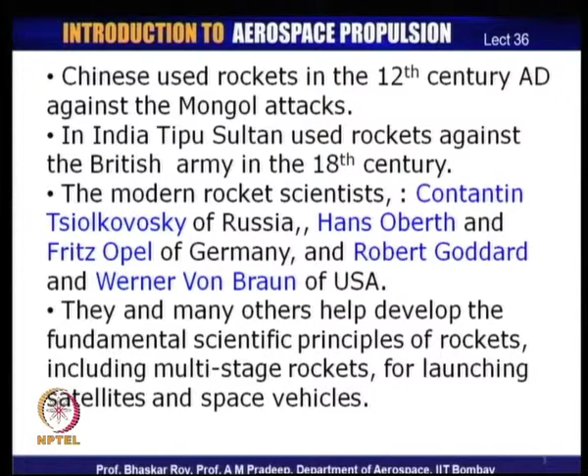Let us take a look at some of the modern rockets. One of the first things that you need to know is that the operation of a rocket is not dependent on atmosphere, nor is it guided by the forward speed, which is the case of an aircraft.

Now, this is an advantage, as rocket is the method of propelling vehicles beyond the Earth's atmosphere. So, the atmosphere would have been an impediment, it would have been a resistance to the craft. So, rocket is designed in a manner that it has least amount of resistance, and then it can fly out of the Earth's atmosphere. Indeed, when you are outside the atmosphere, the shape of the vehicle becomes less and less important. So, the shape that we are familiar with for aircraft is no more necessary for rockets.

The disadvantage, of course, is that there is no air available anymore. Air was the primary working medium for air breathing engines, which means that you have to carry the fuel and the oxidizer. Now, as we know, the fuel and oxidizer both are required for combustion purpose, and hence for rockets you have to carry both of them within the body of the rocket, which means you have to carry the weight of both the fuel and the oxidizer till they are completely used up.

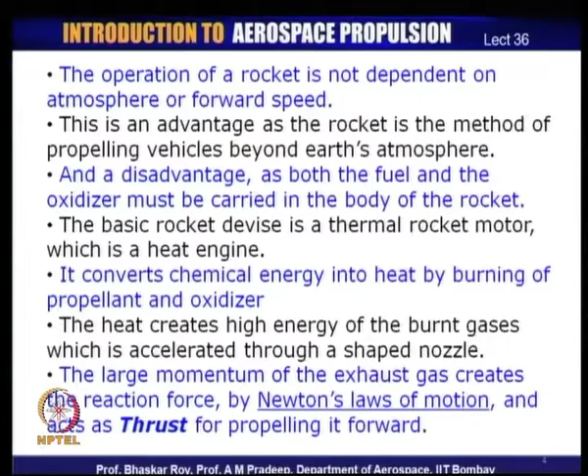So, thrust is created through various physics. First is release of heat, second is expansion of the gas or acceleration of the gas through a properly designed nozzle. And if you do that properly, the exhaust gas then gives a reaction, and then Newton's laws of motion apply, and you have thrust that is created by this exhaust gas. This thrust is what we use for propelling the rocket, first through the atmosphere, as it has to be launched from Earth's surface, and then through rarefied medium outside the atmosphere, and then out into space where there is no atmosphere at all. So, this is the basic mechanism by which a rocket normally works.

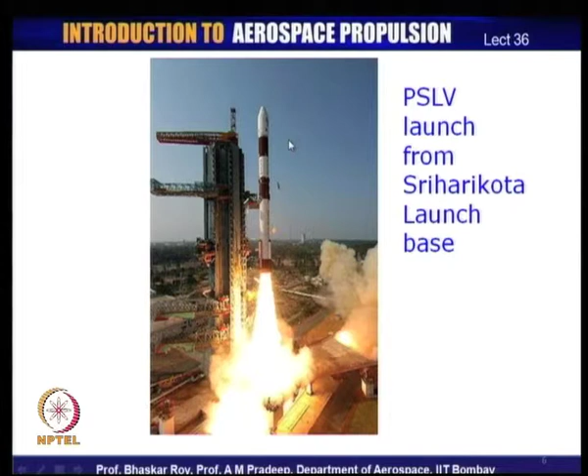So, some of these would actually fall off after the whole rocket has gone to a very high altitude, and then the so called second stage will take over, and then after a certain while the second stage will also fall off, and then the third stage will take over, and after some time even the third stage would fall off, leaving only the payload, which is the main satellite, to go on to its orbit or go on to its mission.

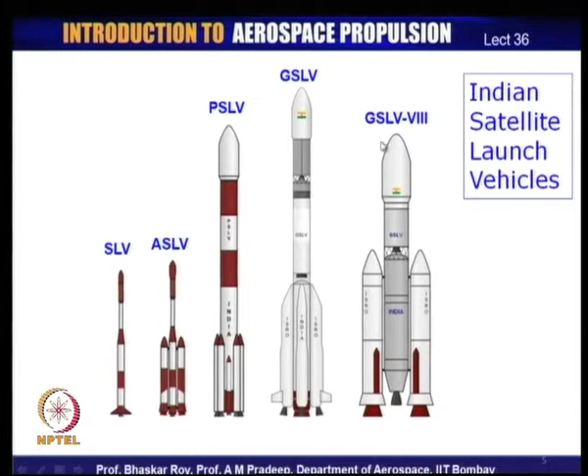We can see that in our Indian rockets also, it has a number of stages. This is the first stage, this is the second stage, this is the third stage. Sometimes you have 4 stages, this could actually be a 4th stage, and then you have the payload on top of it, which is the satellite. So, this is called satellite launch vehicle. So, the whole of it is the launch vehicle, on top of it is the satellite, which is used for various purposes. So, people have been using these for various purposes.

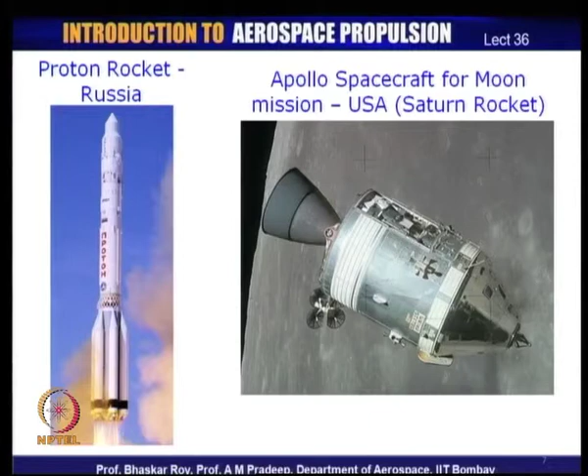US has used it to send man to moon. Russians have also done that, and they also send various satellites to the orbit for various purposes, just like our Indian program. This is the space shuttle Columbia launch, and here you can see that there is a huge big rocket, which is the Saturn rocket, and strapped on that is the Columbia, which is the reusable launch vehicle.

So, the rest of the launch vehicle actually is not reusable. Typically, a rocket, once it is launched and it goes up, most of it falls off and is not reusable. They are completely burnt off and dispensed with. Now, this space shuttle, which is strapped on this big Saturn rocket, actually goes to space, and it comes back and lands like an aircraft.

So, that is why this is shaped like an aircraft, but it cannot take off on its own and go to space. So, it is strapped onto a big Saturn rocket, and then once it is high up in altitude, actually somewhat outside the Earth's atmosphere, the space shuttle gets released from the main rocket body, and then it can go around the Earth's orbit on its own.

As I mentioned, the shape in that kind of orbit does not matter. It could be shaped like an aircraft, or it could be shaped like anything, and it would still go around the Earth's orbit, as there is no air resistance involved. However, when the space shuttle tries to come back to the Earth, it has to again negotiate the atmosphere.

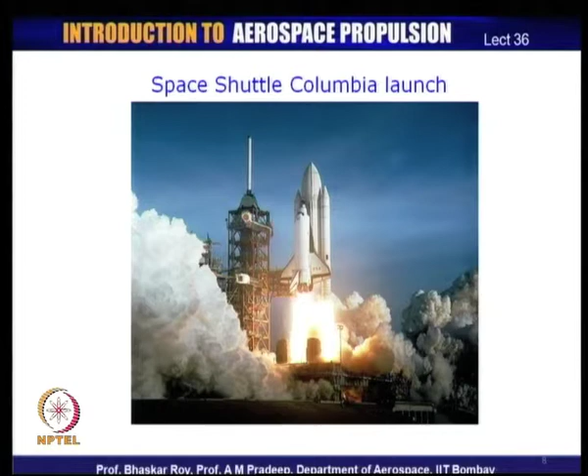So, that is why it is called a space shuttle, because it comes back and it is reusable. It can be launched again with the help of another rocket.

Let us look at various kinds of missiles. Missiles are typically used for various military purposes, and hence some of their configurations may be guarded secrets, but we can take a look at all kinds of missiles that are normally used, and each of them is designed for a particular purpose. Now, missiles are used for certain targets. So, you have a certain target to which the missile is launched, and it has to hit that target.

Now, it could be an air to air missile, which means it is launched from air, maybe from an aircraft, and it is to hit another target which is also in air, could be another aircraft. It could be an air to surface missile, which means it is launched from an aircraft, and it is to hit something on the surface of the earth.

It could be an anti-ballistic missile. We will see the ballistic missiles, and this missile is supposed to go and hit that ballistic missile, to counter a ballistic missile, and hence it is called anti-ballistic missile. So, it has to intercept a missile while that missile is moving in the atmosphere and hit that missile. So, it has a purpose of hitting something in motion in the Earth's atmosphere.

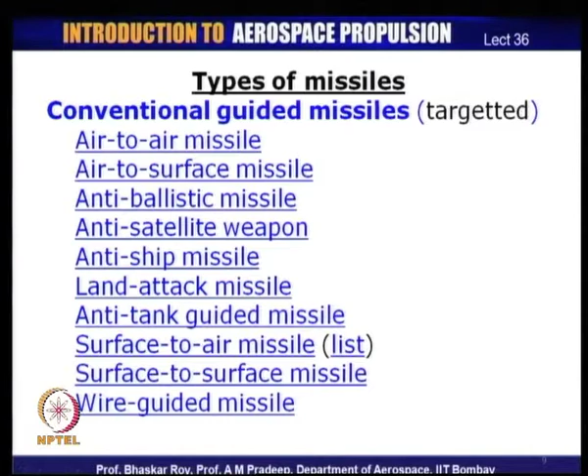Cruise missiles normally have a long cruise flight, very much like an aircraft. That means it flies at a constant altitude for a large part of its flight. Most missiles actually have a parabolic or some arced, curved trajectory, which means that they do not cruise, but the cruise missile is one of a kind which cruises for a long time in its path, which could be hundreds of kilometers, and then lands at a particular predetermined target.

So, that is why they are called cruise missiles. They are designed to cruise at a constant altitude over a long period of their actual flight. Now, the ballistic missiles are the aim and shoot kind of missiles, which are used again for various military purposes, and the purpose is built into the nomenclature or name of these missiles.

They are called tactical ballistic missiles, the short range ballistic missiles, theater ballistic missiles used in specific kinds of war situations, could be on the top of a mountain or in a very difficult terrain. So, those are called theater ballistic missiles. Then you have the medium range ballistic missiles, which can probably go over 100 kilometers or so. And then you have intermediate range ballistic missiles, which go on for maybe a few hundred kilometers and hit a target.

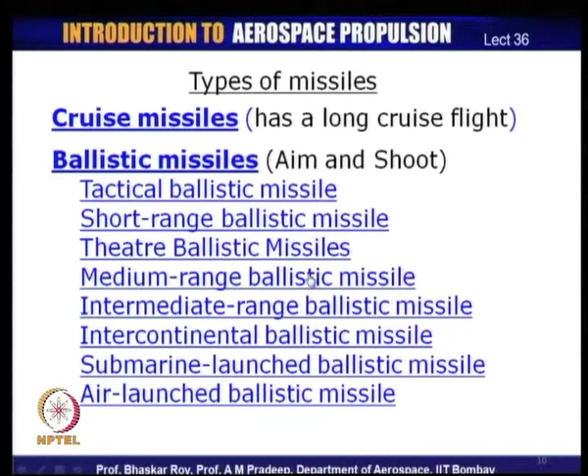This is an old German V2 missile. The reason I am showing this old missile is because most of the other missiles are guarded secrets. They are secret technology, which is normally not available to the general public, and hence we can look at a somewhat older missile, which was actually used during World War II. And as you can see here, the missile houses a number of components. Right on top, you have the unit that is often called payload in simple rocket terms, but in case of a military application, it would be called a warhead.

And then you have the various control systems, which control the craft and finally the warhead onto the target. So, this is the control or gyro control, as it used to be known earlier, which guides the warhead or the payload onto the target. And then you have various other systems, the radio system and so on, which are housed over here for it to be communicated with the ground system, so that the ground control can guide this system onto its target. The various other systems are there.

The rocket body, as you can see here, houses all the other systems. You have the liquid oxygen that is stored over here, and you have the hydrogen peroxide tank, which is stored over here, and then you have the nozzle at the end, through which the high velocity jet finally comes out and creates the thrust. So, these are the various kinds of systems that are normally housed inside a typical rocket body, in this case a particular missile, which have the control system, the navigation system, the fuels and the oxidizers, which are stored in tanks. As I mentioned, they have to be carried within the body, and most of the body of a rocket is typically occupied by the fuels, the various kinds of oxidizers and propellants. They have to be carried in the tanks, and they actually occupy most of the space.

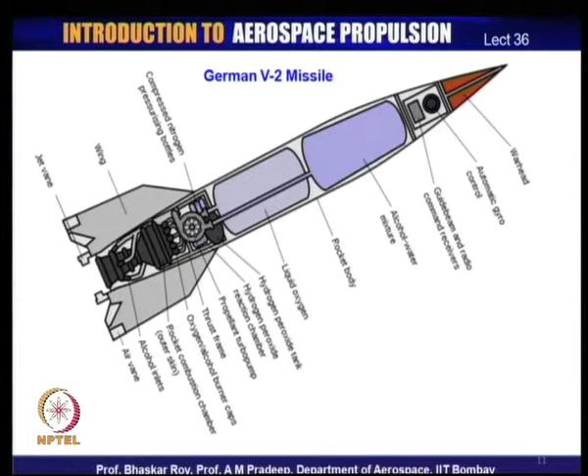And then of course, you have the pumps, which pump this fuel into the rocket chamber or the combustion chamber of the rocket engine, and then it goes out through the nozzle. So, the rocket chamber is of this size, which is much smaller than the body of the main rocket, and the nozzle is right at the lower edge of the rocket, from which the high velocity gas comes out. So, this is typically the body of a rocket, which could be a missile or any other kind of craft. They all have certain common features, and these are the common features of any kind of rocket that you may like to look at.

Let us try to take a look at the various fundamental sciences that are contributory to the operation of a rocket. Now, if we look at the fundamental physics of what is happening, you have a rocket chamber, which is often called a combustion chamber, in which the combustion is initiated, and we shall see what all kinds of combustion is done in a few minutes.

What it creates is a very strong pressure field inside the combustion chamber, and then this high pressure gas is released, and it continues to create this pressure field before it goes out through the nozzle, and when it goes out, of course, it creates the thrust. Now, if you consider the nozzle and combustion chamber together, they may be called the rocket chamber, and this pressure field inside the rocket chamber is acting on the inner surface of the entire rocket chamber.

On the outer surface, you have an external pressure field, which may be the Earth's atmosphere, or it may be no pressure field. That means, there may not be any atmosphere at all, and the differential of the two, when integrated, actually gives you the net thrust. So, this pressure field integrated over the entire area would finally give you the net thrust in the direction which is the axis of the rocket chamber.

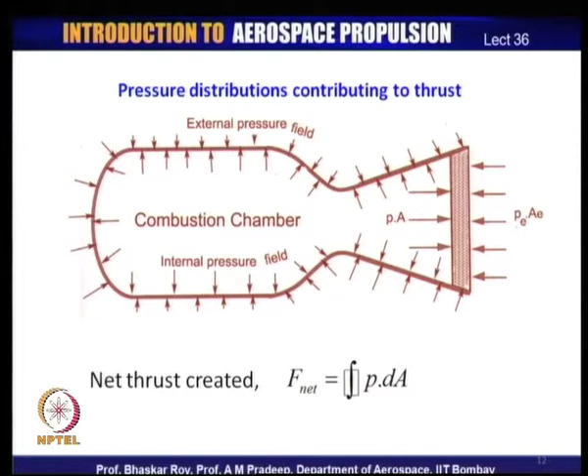If you consider this chamber to be an axisymmetric body, the radial components of this pressure field would actually nullify all around. That means, they counter each other, and there is no net component acting in any direction, and hence the only component that would be active is the horizontal component, or the component parallel to the axis of this rocket chamber, and that net component is the thrust. So, this is how one can use the basic physics to understand how the thrust is created.

Let us look at how the basic heat engine is conceived. Now, we have looked at various kinds of jet engines and the jet engine cycles, and the jet engine works in a cycle. It comes from atmosphere, goes through compression, combustion and expansion, and finally gets released into the atmosphere. In a rocket, we do not have Earth's atmosphere, we do not have air, which means that the working medium has to start on its own, come out through a process of combustion, and then a process of expansion, and there is no return path, there is no cycle. So, at best one can say it works in a half cycle.

So, it works through a process of combustion, which is approximately a constant pressure process, and then comes out through a process of expansion. So, even though a jet engine or a rocket, which is also a jet engine, work as heat engines, there is some difference in the way they are fundamentally conceived. And this is the fundamental difference, that the other air breathing jet engines work in a cycle, the rockets do not work in a cycle.

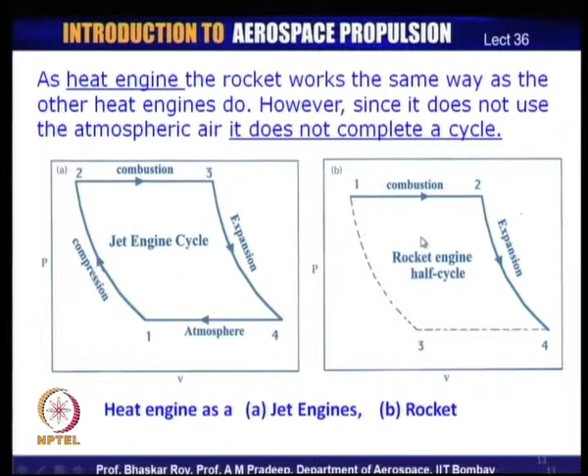Now, a rocket fundamentally has two basic kinds of fuel and oxidizer system. One in which the fuel and oxidizer both are liquid, and hence they need to be separately pumped into the rocket combustion chamber, so you need a pumping unit for each of them. The other variety is where both of them are solid, and they could be separate bodies of solids, or quite often they are mixtures.

These mixtures have been used for many centuries now by the Chinese and Indians for creating rockets. The early rockets were all what we call today solid propellant rockets, used by many people around the earth in the ancient era. In the modern era, these solid bodies are designed in various shapes, which we shall look at in one of the next lectures, and see how those shapes contribute to performance. And in both cases, once the propellant and the oxidizer are burned, the mixture of gases created is released through the nozzles for thrust creation.

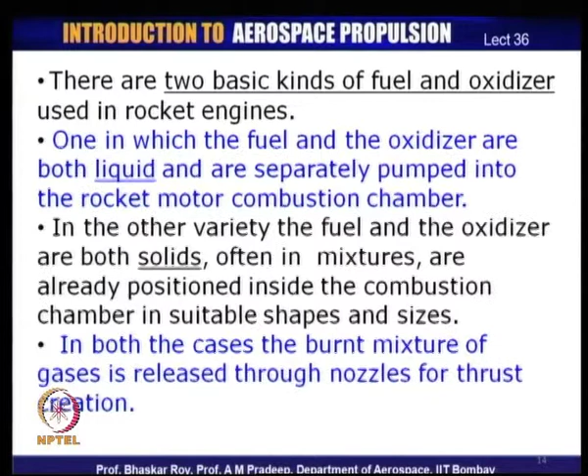Let us look at a schematic of two fundamental kinds of rockets. One is the liquid, another is the solid propellant rocket. In the liquid, you have the fuels in one tank, you have the oxidizer or oxidant in the other tank, and they are pumped separately into the combustion chamber.

Now, this is the combustion zone in which the combustion is to be carried out, which means the fuel is to be pumped. They are to be released into the combustion chamber through injectors, and these injectors do a number of jobs. That is, it atomizes the fuel, then the fuel is released, the fuel is vaporized, fuel mixes with the oxidant, and then the mixture is burnt.

That means, a flame is created, and then this flame releases the heat energy into this combustion zone. And then the mixture of gases proceeds from the combustion zone, where the combustion process is to be completed, at least 98% completion, and then the mixture moves in the combustion chamber forward towards the nozzle.

Even as it is moving forward, the combustion process may be completed, and so by the time it comes at the beginning of the nozzle, the combustion process is said to be completed, and now it has very high pressure and very high temperature. This very high pressure, temperature gas is now released through the nozzle, which is normally a convergent divergent nozzle. So, initially you have a convergent nozzle, which makes the flow go sonic.

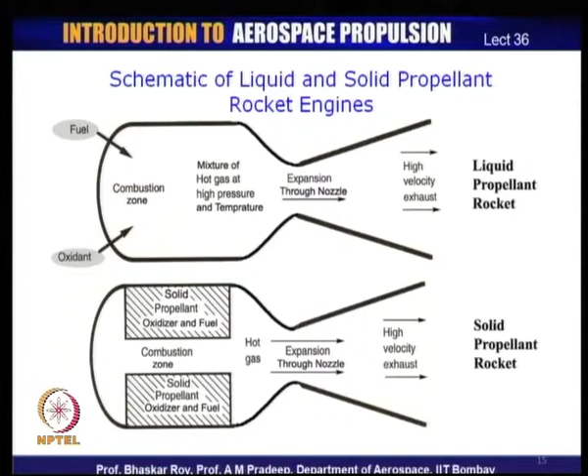Some of the bigger missiles, like intercontinental missiles, could have a combination of liquid and solid, which could be multi-stage. So, the first stage could be liquid to carry the total weight of the entire rocket body or the vehicle body, and then later on, once the first stage is released, the next stages could be solid rockets, which are a little smaller in size, and hence they can carry the vehicle much farther into the atmosphere or beyond the atmosphere. So, combinations of liquid and solid rockets have also been used for various kinds of launch vehicles.

Now, let us take a look at basic rocket science, how the thrust is generated. You see, rocket science is based on a very simple principle actually. You know Newton's laws of motion. You know that if you create a large gas energy that is coming out of a body, it will immediately give you a forward motion. It can be done on a very small scale in your laboratory. If you open the end of a balloon and release it, the balloon will move much like the rocket movement.

So, basically release of the gas will always tend to give you a certain amount of motion, and then in typical modern rockets the motion needs to be controlled. So, you have a guidance system, you have a navigation system. All those systems are housed in the body of the rocket. However, the main problem of the rocket is creation of the thrust. So, much of the body of the rocket is actually used in storing the fuels, managing the fuels, and then of course, managing the combustion process and then releasing it through the nozzles.

So, the basic rocket engine is more about its heat engine and less about the craft, which is basically a cylindrically shaped body, at the tip of which you have a payload. So, the various purposes of the rocket are served by basic fundamental science. Let us take a look at this fundamental science, which governs all kinds of rockets, missiles and various kinds of satellite launch vehicles.

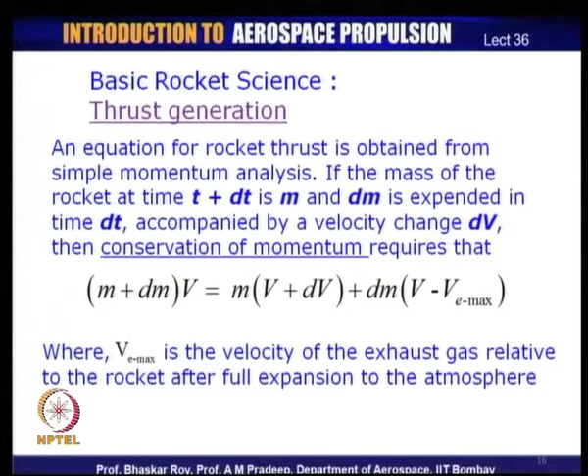Now, if you slightly work on that equation, it devolves into a much simpler form, which can be differentiated to give you a very simple equation: m dv/dt equals V e max into dm/dt. Now, m dv/dt is the propulsive force or thrust, which is m into acceleration. dv/dt is of course the acceleration. So, that gives you the propulsive force or the thrust that you require for this body to be moved, and that is the thrust you need to create.

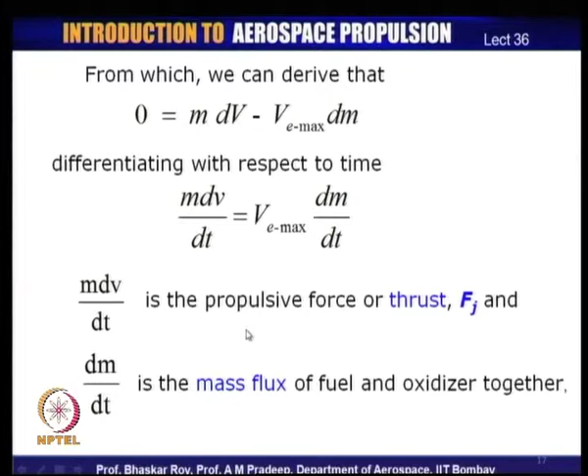Now, dm/dt is the mass flux of the fuel and oxidizer together. Remember, the rocket carries the fuel and oxidizer and there is no air available. So, this is what is coming out of the rocket body, and this is the thrust you need to create to move the entire rocket body through the atmosphere or anywhere else. So, this comes out of the basic motion of the rocket body.

So, the jet thrust that you need to create can also be written in terms of V e max, with which the fuel and oxidant together, the jet, are coming out, and the mass flux of the fuel and oxidizer together, and that gives you the thrust. This thrust must be equal to the thrust required for the motion of the body, and as a result you have a properly matched engine and rocket body. Now, this exhaust velocity, which we call V e max, at the moment we are assuming that maximum velocity has been created.

It is worked in an ideal condition, the nozzle is working as an ideal nozzle, and then it is expanding into the atmosphere in a complete expansion process, and that creates V e max. We shall see later on that a rocket does not create V e max all the time. It creates a velocity V e, which is not necessarily maximum at all times of its operation.

Now, this V e max depends on the design of the exhaust nozzle and on the local ambient condition of the flight. So, in a well designed convergent divergent nozzle, the exhaust velocity can be calculated and is known. For flights within the atmosphere, they can be calculated quite easily, reasonably approximately for all engineering approximations.

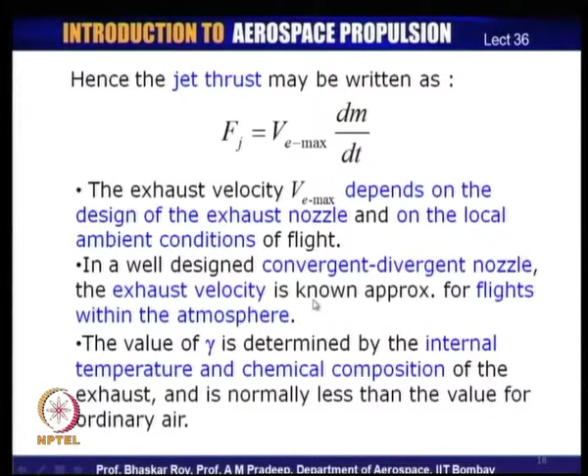And the value of gamma is determined for the mass of the gas with the help of the internal temperature and chemical composition of the exhaust. And it is normally much less than the value that is used for ordinary air, normally quite less really at high temperature and pressure. Now, these are the equations with which you can calculate the V e. As I said, the value of V e can be easily calculated.

This is the velocity with which the gas is flowing out. This is the temperature of the combustion chamber with which it started, and this is the exit temperature. So, this is a simple governing equation of velocity you can write from your fundamental thermodynamics, the isentropic flow that you have done, and if you derive this, you can convert the temperature ratio to pressure ratio, assuming an isentropic process, for the time being an ideal process.

And if you do that through the nozzle, finally you get the cycle efficiency, which is equal to this, as you have done in your thermodynamics. And for the time being, if you assume that the cycle efficiency is 100%, that is 1, you get the V e max. So, this is V e max. We started by trying to calculate V e, and we can get V e max by assuming the cycle efficiency to be 1 or 100%.

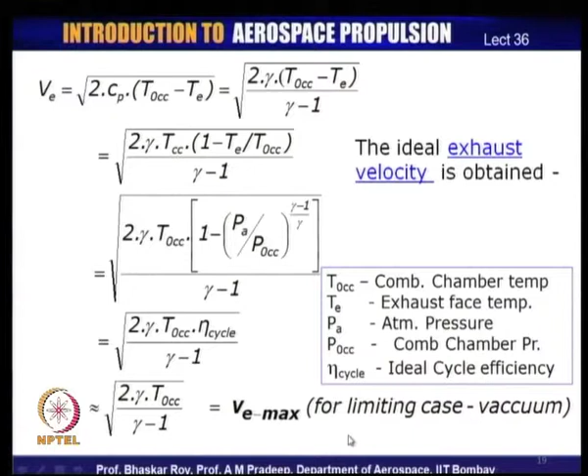And if you do that, you get the V e max, which is for the limiting case, that is in vacuum. So, this is what you get when the rocket actually flies in vacuum, that is well outside the Earth's orbit, outside the Earth's atmosphere. Otherwise, in atmosphere you can calculate by the earlier steps that are shown over here.

The specific impulse values at sea level and at various altitudes are not the same, as we know the thrust is going to be different, as we shall see very soon, and you would know very well the value of g would vary from Earth's surface to various high altitudes. It is something at Earth's surface which we use all the time in our physics, but once you go to high altitude, the value of g changes, and hence you have to use different values, and hence the value of specific impulse would vary from Earth's surface at sea level to various altitudes which the rockets normally would fly.

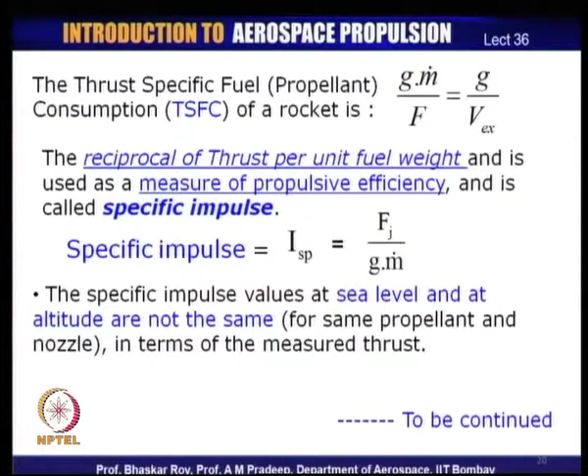And hence, these are the various parameters that typically specify a rocket and a rocket's operation: the TSFC, the specific impulse, and the exit velocity. We shall continue with this in the next class, and we shall introduce a number of other parameters that typify a rocket and its operation, and quantify how good the rocket is and what this engine could be used for, whether for a missile, a satellite, or any other purpose, which can be found out from these parameters. We shall be introduced to a number of other parameters pertaining to basic rocket science in the next lecture.